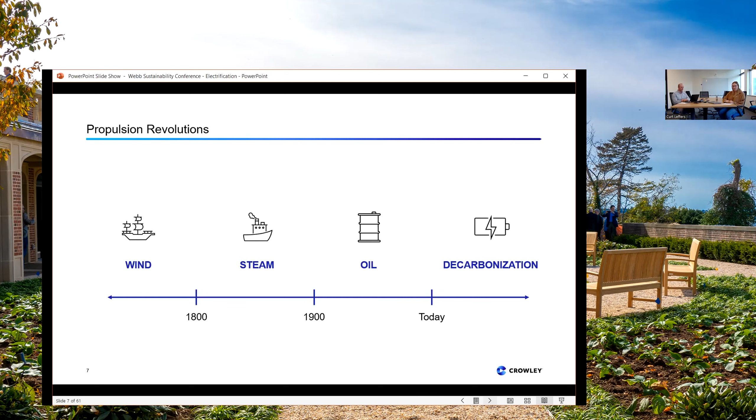So today we see ourselves in a new era of another revolution in propulsion systems. There's a large focus on decarbonization. And looking back, we can see that there have been a few in the last couple hundred years, going from wind to steam or coal to oil, using diesel and HFO, and now in decarbonization with a large focus on not using carbon-based fuels and finding alternative technologies. So with that in mind, it brings us to the topics we're going to discuss today: electrification and decarbonization and future fuels.

So what is electrification? The process of replacing technologies that use fossil fuels with technologies that use electricity as a source of energy. And electrification isn't the final or the whole solution, and it doesn't necessarily mean a reduction in carbon emissions, depending on how you use the terminology. It allows greater flexibility in implementing the new technologies.

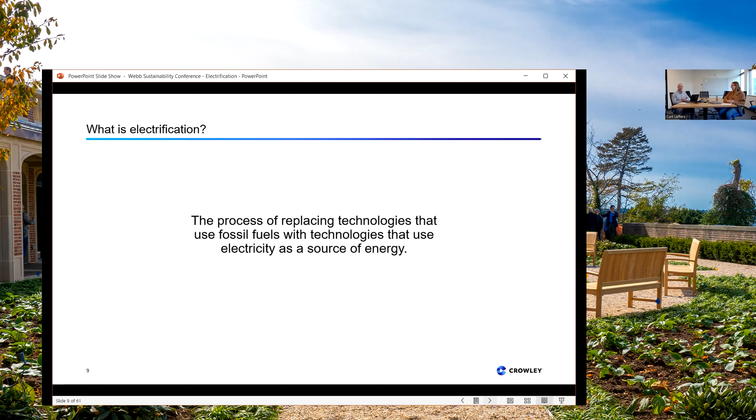So why do we need it? There's no clear answer to the future of marine propulsion. There's a lot of maybes and question marks out there right now, and a lot of ideas in how we can reach our goals. But a lot of the solutions include one common factor, and that's electrons.

So electrification allows multiple sources of power to contribute. We have generators, batteries, fuel cells, solar, and it allows greater flexibility in expanding the system at later dates. So there's a lot of future proofing involved. What is the technology going to be in 15 years? We don't have that answer right now. So designing the system to accommodate as much as possible is key.

I want to clarify one thing. Diesel electric systems have remained fairly common over the last 50 years. It's not a new thing. And that's just where alternators are added onto the diesel engines to create electricity from the mechanical energy.

So rather than the engine turning the shaft directly, the electricity that's created gets passed through switchgear to electrical propulsion motors to turn the propeller shaft. And this has typically remained an AC, alternating current, system, and was often pretty complicated.

So in discussing electrification moving forward, I'm going to focus more on the way we're discussing it now, which is a bit newer. The topic is more focused on hybridization, so using multiple sources of power, and decarbonization. So we'll talk a bit about, and stay pretty high level about, some of the technologies that are enabling electrification and are the reason behind this transition.

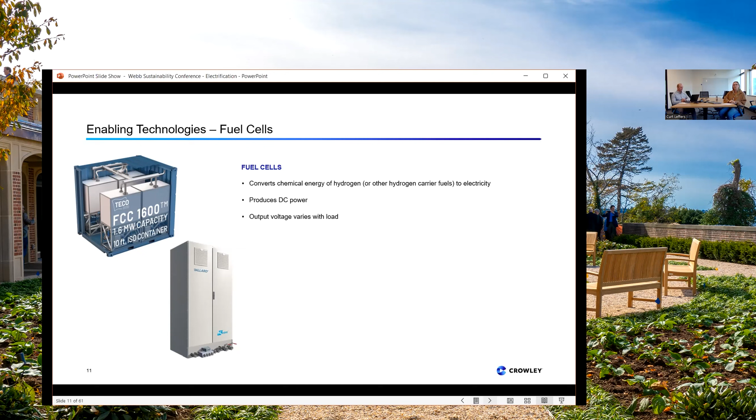Very quick overview. Next, we have batteries, and lithium-ion batteries are more where my expertise plays. So they're rechargeable energy storage systems using lithium ions as a key component of electrochemistry. And I'm sure we all have laptops and cell phones that all have lithium-ion batteries involved. So the marine systems take lithium-ion cells and package them in a way to make the mechanical form factor more friendly for larger installations, and the systems are marinized for installation in ships.

So the chemistries that are most popular are NMC, nickel manganese cobalt, and LFP, lithium iron phosphate. And these are the two that are most common in automotive as well. And then lithium titanium oxide, which is a little bit different, but still relevant in the marine industry.

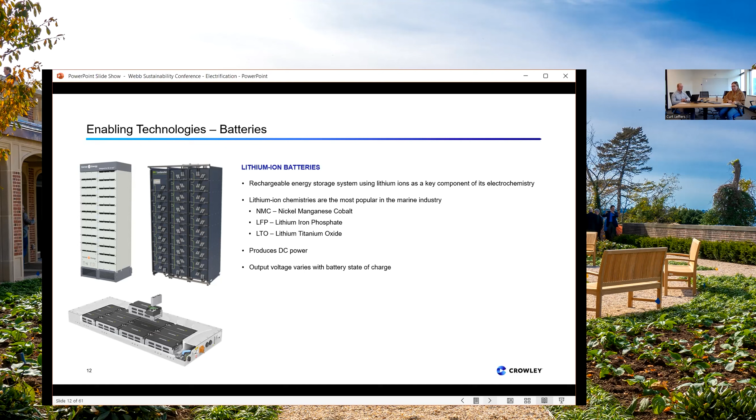So batteries produce DC power, and similar to fuel cells, the output voltage can vary, both with the battery state of charge and with how hard you're using the battery. So if you're drawing a lot of current and you're at a low state of charge, your battery is going to be at a pretty low voltage. Whereas if you're at a high state of charge and you're not using the battery very hard, you're going to stay at the top of the range. Next one.

So both the fuel cells and the batteries produce DC power, which is key in another part of the transition in the industry, which is a shift from an AC propulsion system, as we've seen in most of the diesel electrics that have been in operation, to a DC propulsion system. So the generators and motors will remain AC. So these aren't changing too much. Obviously, there's always a drive for greater efficiency to see more fuel savings.

There's also some new technologies in the DC grid market that are enabling this shift. DC-DC converters, DC-AC inverters, AC-DC rectifiers, DC circuit breakers. I'm not going to go into too much detail on these just because you can fill a whole hour just talking about these technologies. There's some interesting papers that have gone more into the weeds with the benefits of DC technologies as compared to AC that I would be happy to share.

But the reason that we're seeing this shift is it's more efficient with adding these new technologies. So if you have the batteries and the fuel cells producing DC power, it's easier to implement more of these technologies into a DC bus than it would be to convert the power from DC to AC back to DC. We can go next one.

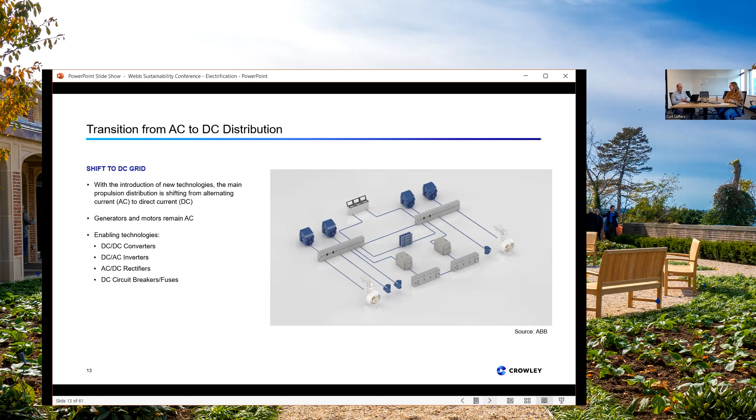So for an example of what an AC bus would look like, this is just a typical diesel electric. You would have just a propulsion generator creating AC power, typically 480 volt, 690 volt, or at the higher end, sometimes 4160 VAC, and these are all at 60 hertz in the US. So it creates AC power to a bus, which is then distributed to the propulsion motor, commonly through a variable frequency drive, which is the current state of the art.

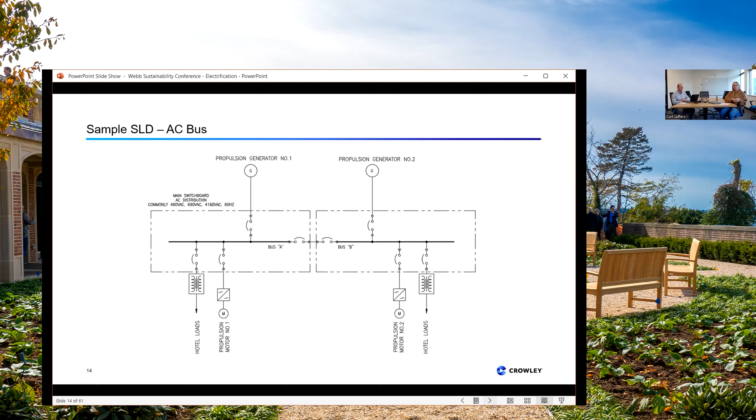We also see the hotel loads are fed from this, and that's the lights, the pumps, anything that is non-propulsion related, but electrical on a ship. And if you compare this to the DC system, we lose a lot of the circuit breakers. So instead of having these current interrupting devices, we have rectifiers, inverters, DC-DC converters, which have fuses inside, which will interrupt the current.

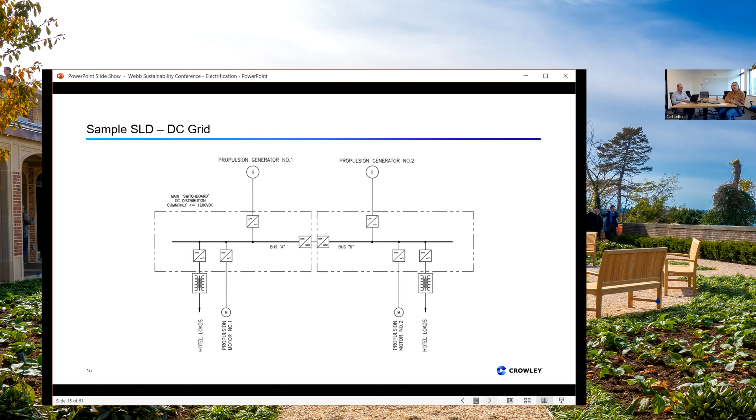And I did not put batteries or fuel cells on here, but those would be connected directly to the bus as well. There's different ways you can implement this technology. And I think what's key to really understand here is that there is a shift in the technology that is used on vessels. It's not new technology in the sense that it's novel, but it's new to the marine industry. And it looks different. There are a lot more cabinets and fewer moving parts.

Oh, we're good. Okay.

So when do you use new technologies? When do you use fuel cells? When do you use batteries? When do you use a combination of both? I think it's important to understand that not every technology fits with every application. There is a fine line between optimism and realism in designing a ship right now. And I think it's quite important to really understand how the technology is going to be used to ensure that there's actually a fuel reduction and you're not just painting a green battery on the side of a boat for the press.

So things to take into account: vessel size. Is the boat really large? Does it take a lot of power to push through the water? Is it really small? Is there enough physical space to put this new technology in the vessel? Vessel speed. I'm sure we've all seen the speed versus power curve. The faster you go, the more power you need. The longer you go fast, the more energy you need. So the battery size or the fuel you need to store on board gets quite a bit larger. So that's related to the route length.

Refueling and charging opportunities. Does the boat stop by the pier often enough to refuel? Curt will show a slide that shows the relative energy densities of the fuels. So some require significantly more volume on board and weight to carry the same amount of energy as our standard diesel right now. So you may need to refuel or charge more often. Does the boat have a consistent route? Is it a ferry that just goes back and forth with a consistent schedule? Or is it a fishing boat, for example, which may go out for weeks at a time?

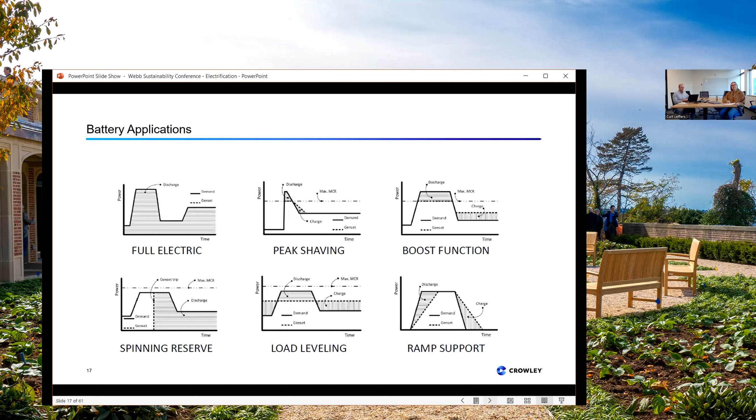Shore charging. So with electrification, I'm still focusing mainly on the battery operation. To maximize the carbon emissions reductions, shore charging is often used, and most of the time shore charging will be used for vessels with shorter routes that operate close to the terminal. So we'll see this a lot with, again, passenger vessels and tugboats.

So it will be much more rare to see shore charging, not cold ironing, not shore power, but actual charging of the energy storage on board of cruise ships or container ships with much longer routes. Right now, we're still in that smaller category. So there are some considerations to take into account with shore power to make sure you can maximize the carbon emissions reductions and fuel reduction.

Charging requirements. How quickly does your boat need to charge? How high is the power? So we're seeing different ranges starting from less than a megawatt of charging power up to upwards of 14 megawatts in downtown Seattle. So the technology required to do the actual transfer of electricity, to do the actual charging, is quite different with both scenarios.

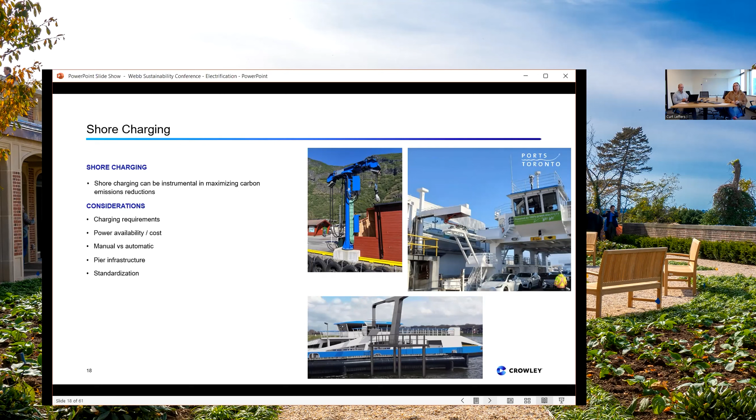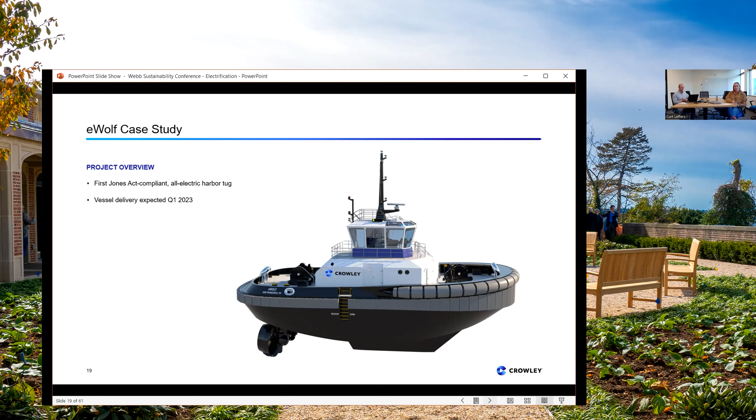So it's a quick case study, and then I'll let Curt talk for a while. We have the eWolf, which is a Jones Act compliant all electric harbor tug that Crowley is building currently. It's under construction at Master Boat Builders in Alabama. It's expected to be delivered in Q1 of 2023. Looks quite nice without the exhaust stacks.

So very quickly, there's 6.2 megawatt hours of batteries on board, which if you compare to the few hundred kilowatt hours that may be in a car, that may even be a lot. It's quite a high amount of energy storage, and the batteries take up a lot of space. The profile for this tug, specific to the Port of San Diego, really lent itself to all electric operation. So by all electric operation, I mean, there will be no generators running at all during operation.

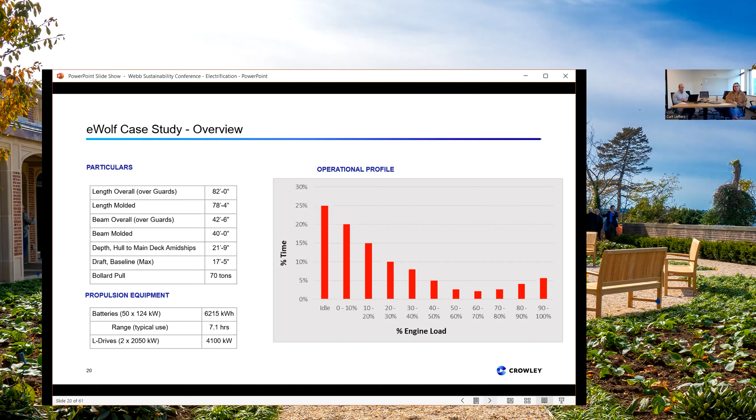It's clean. So from a design perspective, it can be both easier and more difficult to place the equipment. You don't need to maintain a shaft line, but there's a lot of different form factors involved. And sometimes with tonnage considerations, it can get more difficult to place this equipment. It's been very interesting over the last few years, understanding the differences in general arrangements and how this equipment is placed.

I worked on the Washington State Ferries, which has a 10 megawatt hour battery system, and the onboard DC grid for the cabinets with the inverters, converters, rectifiers, all that was huge. It was like a game of Tetris to figure out how to fit it in the boat. Excellent.

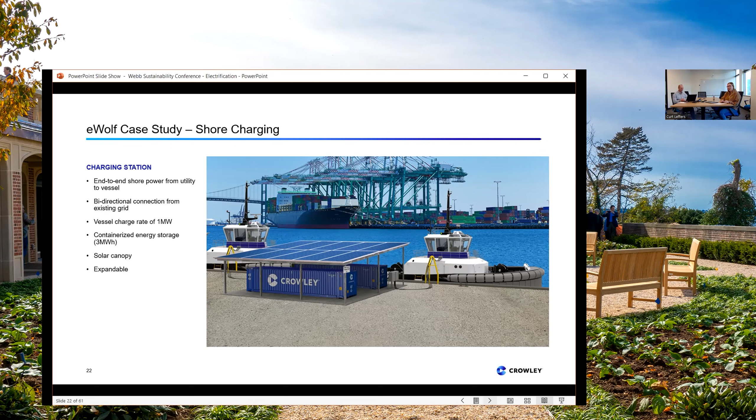And I could probably talk for another hour on this subject, so I'm sure I skipped a lot of detail, but with that, I'll pass it to Curt. All right, thanks a lot, Eileen.

That was really interesting. So for the purposes of this next part of the presentation, we're really going to focus on the characteristics and design considerations for future fuels. And there's really 3 key points that we're going to cover in this section. Those 3 points are: what are the most common future fuels for maritime? And what are the vessel design considerations to accommodate these fuels? And then we'll close by talking about a case study for a hydrogen fuel tug that we've been working on. And you can actually see a rendering of that tug in the image here on this slide.

And a couple of things to point out here. For the purposes of this presentation, we'll define future fuels as lower carbon alternatives to petroleum diesel. And of the future fuels that we're going to be talking about, all but one, to my knowledge, are actually in use. But with respect to the term future, we'll consider that to mean widespread adoption in maritime.

Okay, so what are the most viable future fuels for maritime? We're going to talk about 4 primary fuels, and this is not an exhaustive list. There are other fuels also being considered, but these are the 4 that are most commonly focused on now by vessel designers, vessel owners, and engine manufacturers and fuel cell manufacturers. So the 4 that we're going to talk about are methane, which is the primary constituent in natural gas, and we'll talk about methanol, hydrogen, and ammonia.

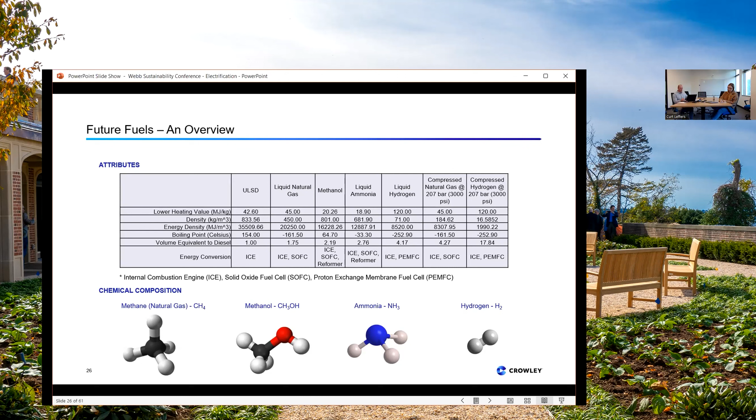Interestingly, we've also included compressed natural gas, which is also a little over 4. And then when you get to compressed hydrogen, in this case, in the pressures we're looking at, which is 207 bar or 3,000 psig rather, is almost 18 times the amount of volume.

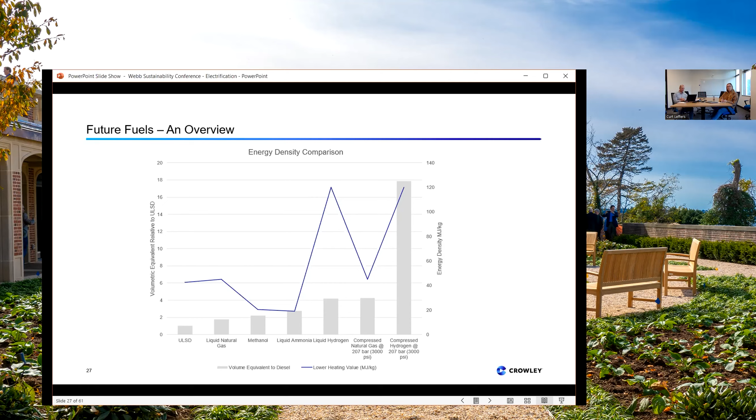Okay, so now we're going to jump to design considerations. And there are actually a tremendous amount of design considerations that you have to factor in when designing around these future fuels. But I want to talk about 3 of what I consider to be the most important. So we'll start with the regulatory compliance. And the important thing to understand here is that the pace of innovation and vessel design exceeds that of what the regulators can develop in the formal documentation and guidance.

So why that's important is that in most cases, I think the only exception would probably be natural gas, which is well understood now, at least in the regulatory framework, is that when you're embarking on a design project, you need to include stakeholder engagement with the regulatory bodies early and often. So what you want to think about, as this slide indicates, is who are your primary stakeholders. Considerations are class, so ABS, DNV, et cetera, the flag state, and then the International Maritime Organization.

And a really good place to start when you're embarking on this regulatory framework is to defer to the IGF code and IGC code. And the IGF code is the International Code of Safety for Ships using gases or other low flash point fuels. So the 4 fuels that we're talking about here are all low flash point, which is less than 60 degrees Celsius. Or if you're designing a vessel that's carrying these fuels as cargo, you would look to the IGC code, which is the international code for the construction and equipment of ships carrying liquefied gases in bulk.

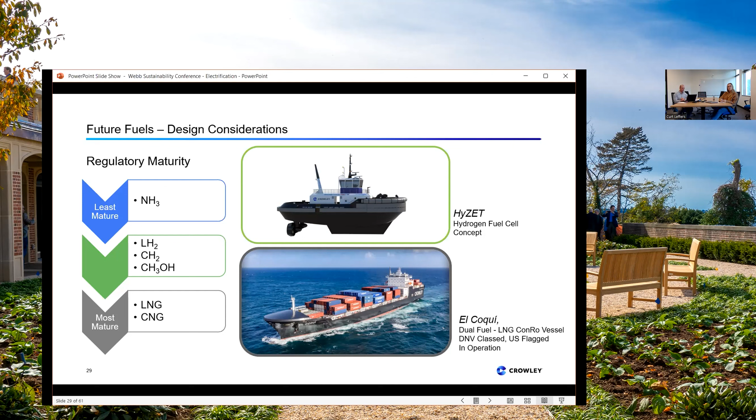Okay, so the second major design consideration that we're going to talk about is fuel storage arrangements. And recall from our discussion around the attributes of these future fuels that all but methanol need to be stored cryogenically if you want them in the liquid phase. So we'll talk a little bit more about that in the next slide. But on this slide, let's just talk a little bit about what are some tank types that you might consider for vessel design. The first is traditional hull tanks, which are really designed for atmospheric pressure. They're integral to the vessel hull. Also think of them as structural tanks, and they really allow you to get the highest amount of volumetric efficiency in terms of fuel storage and the available space in your hull.

A second type would be type A. This is actually an independent tank, so not structural, although prismatic. So it's making a pretty efficient use of the available space. This tank would be suitable for cryogenic fuels or cargo. However, given its geometric configuration, it's not suitable for higher pressures. And talking about the details of that is a little bit beyond the scope of this presentation, but certainly if you have any questions about that, feel free to reach out and we can talk in more detail.

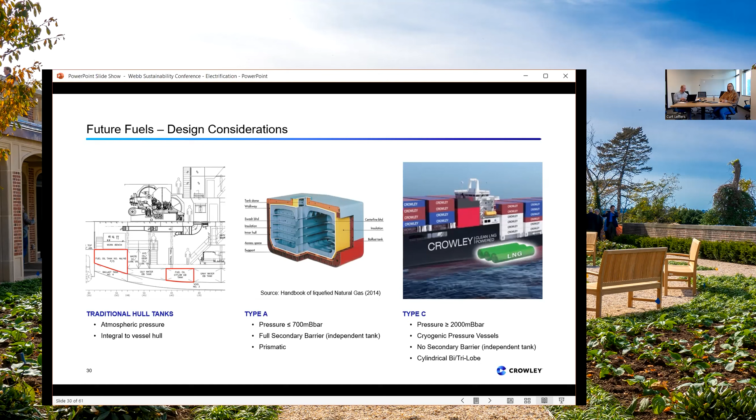Let's see, try to be conscious of time here. I think I'll speed up a little bit so we can get to the case study and allow some time for questions.

But with respect to design considerations, getting back to this whole concept of cryogenic fuels, and why that's important for tank loading, is that when you're talking about cryogenic fuels, whether consumed for propulsion or energy or cargo, you actually not only lose some volumetric efficiency in terms of having to use independent tanks, but there's also a consideration that your loading, so how much fuel you can put in that tank, is limited. And it's limited because cryogenic fuels, as they absorb heat energy, the density actually decreases. So for the same mass of fuel as it takes on heat, the required volume increases. And you have to account for that when you're sizing your tanks.

And specifically, the deduction occurs when you're looking at the relative density of the fuel or cargo when it's loaded, and the relative density of the fuel or cargo at the relief valve pressure setting of the tank. So essentially what that means in a couple of specific examples, when we're looking at liquefied hydrogen, you might see that the usable volume is reduced by up to 30%. And in the case of LNG, it could be reduced by up to 20%. So that's really key in understanding how much volume you might need if you're designing a vessel around one of these future fuels.

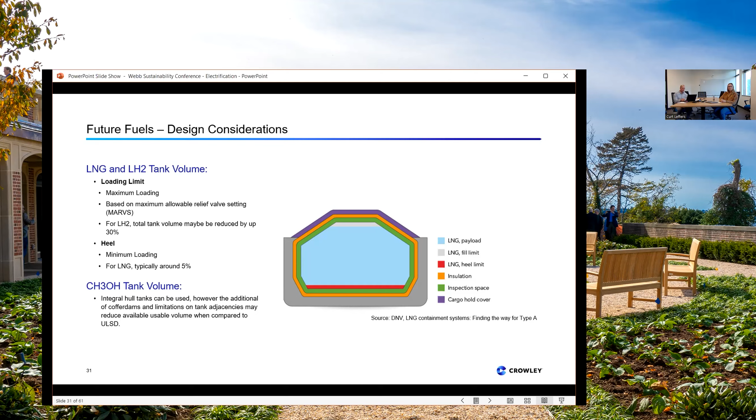Okay, so the last of the three major considerations that I want to talk about are hazardous zones. And I can't stress this enough, but when you're starting a new design or even a modification, say, or a retrofit of a vessel using one of these fuels, you need to start the evaluation and arrangement of your hazardous zones at the same time as you're starting your arrangement.

And that is because the regulations right now, even if you're putting together a design basis using a framework, are pretty prescriptive in that any source of emissions of these fuels, because they're low flash point, requires an offset from gas safe spaces or non-intrinsically safe equipment or electrical equipment that is not rated for the appropriate hazardous zone.

So in general, hazardous zones are classified into three categories. There's zones 0, 1, and 2. Zone 0 is when an explosive gas atmosphere is always present. Zone 1 is present in normal operation, and Zone 2 is not normally present, but possible. So things like tank vents, which you can see here in the snapshot, the largest zone is actually attributed to the vent for the LNG cargo tanks.

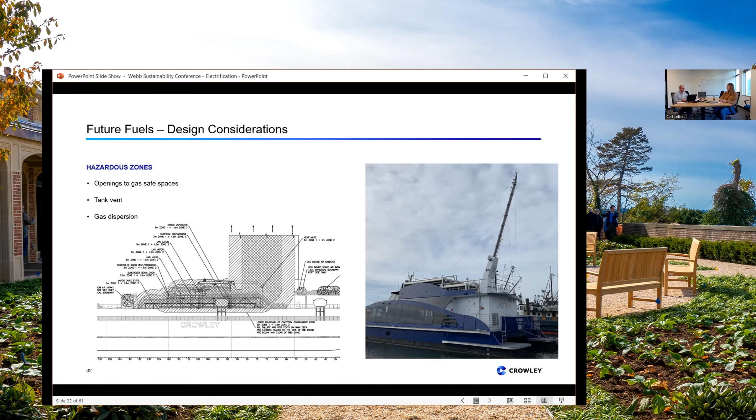You also need to think about emissions requirements. So regulatory, customer requirements, also corporate ESG goals, which are environmental, social, and governance. So Eileen was mentioning Crowley is committed to net zero across all scopes by 2050. That is an ESG goal and helps drive our thinking moving forward.

Also, you need to think about the technological readiness of energy conversion equipment, firefighting, fuel supply. So thinking about what's the production, how does that align with your emissions goals, both regulatory, like we said, customer and corporate. What pressures will there be on the supply chain of the fuel that you choose from other industries?

And then, of course, cost. All these projects that we're seeing cost more than conventional designs. And that may not always be true, but it's certainly true now. So that is a significant factor in evaluating the viability of any project. So when we're talking about cost, you can think of it as capital, operational, and then that rolls up into total cost of ownership.

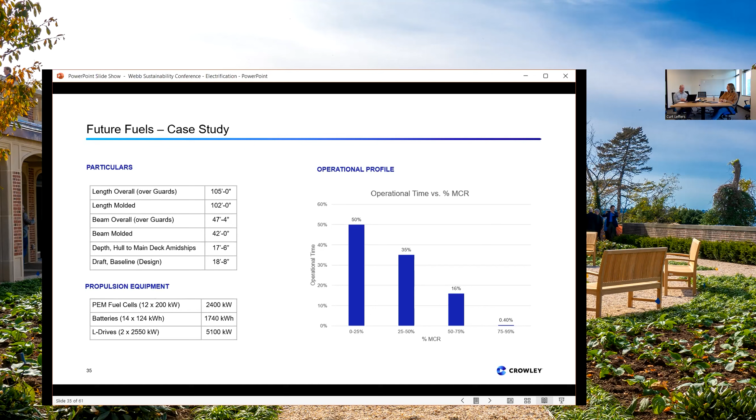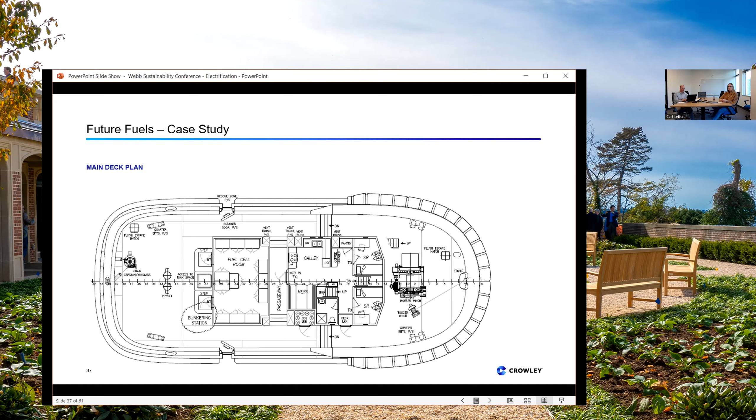So let me quickly jump to the main deck plan. One of the things you'll notice here is that we have a fuel cell room that is actually not adjacent to any accommodation spaces. So it's separated by a passageway. So the fuel cell room will be gas safe in normal operation, although you have to consider the fact that there may be a leak or unintentional release of hydrogen. So that room is currently separate, or rather not adjacent to any accommodation space.

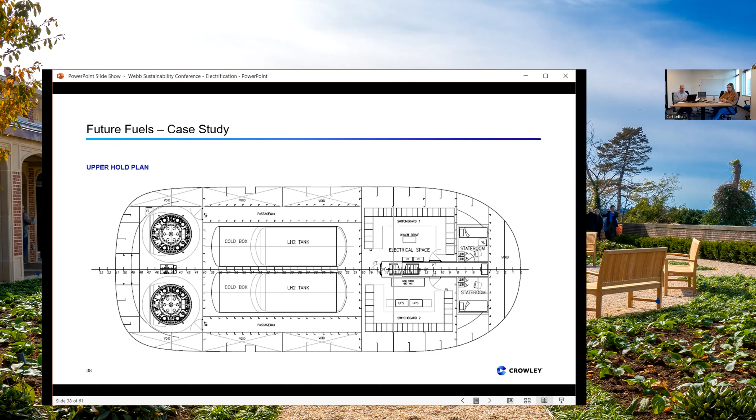So immediately forward to that, we have the switchboard room with the drive cabinets. Eileen spoke to that in detail about how the incorporation of batteries and electric power drives you to have to also accommodate drive cabinets and switchboards. And then if we go to the next level, we can see the battery room, which is where our battery racks will be.